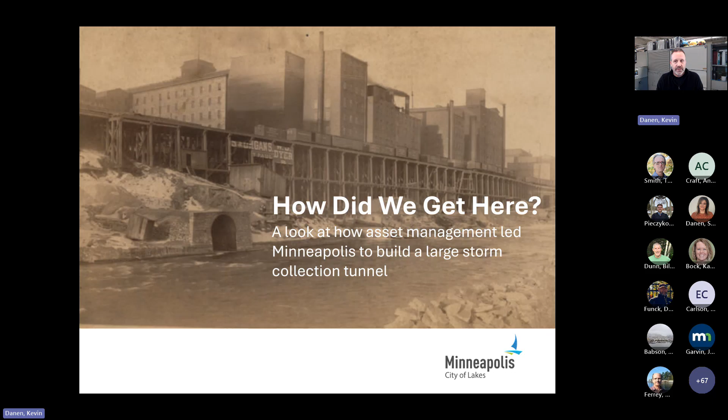We're here today to talk about, obviously, the Central City Tunnel System. And I'll be talking about how our asset management program led us to the Central City Parallel Tunnel project. First, a little overview of the sewer systems in the city of Minneapolis. We have two separate sewer systems. We have the sanitary sewer system and the storm sewer system.

The sanitary system is quite large, 830 miles of sanitary pipe in the city. It ranges anywhere from 6 inches in diameter up to 96 inches in diameter. We've been blessed with mostly a gravity feed system. However, we do have 10 lift stations. The sanitary sewer system dates back to the 1870s when they first started developing the city of Minneapolis. Some of the oldest sanitary sewers we have are in kind of the central core downtown area.

The storm system, not quite as large, 565 miles of storm pipe there. It drains over 54 square miles of city area. We've got 23 pump stations to assist us there with the flow. And we've got 400 outfalls. All the stormwater basically drains into our storm sewer system. And then we direct that flow to area creeks, lakes, and of course the Mississippi River. We've got over 30,000 catch basins to help collect all that stormwater and divert it to the tunnels.

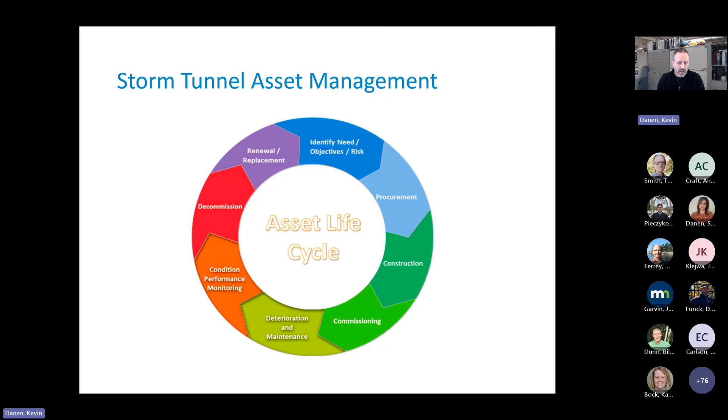And following along with asset management, we use what we call a strategic asset management system. We use a risk-based approach to our tunnels in particular, and we also do use that with the rest of our sanitary and storm sewer systems. But today we're talking about tunnels.

So we basically use two factors to determine our risk score for our tunnels. Those two factors are likelihood of failure and consequence of failure. Basically, we assign each tunnel a score according to likelihood and consequence of failures, and then we multiply those factors and come up with an overall risk score. And we use that to help us identify where we should focus the work on these tunnel systems.

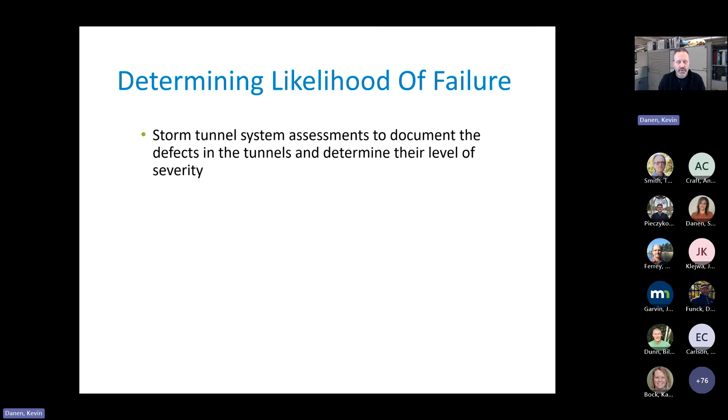When we first started doing this asset management system on the tunnels, we did a complete assessment on all of the tunnels, and it took us, we were part of a team of 4 people, it took us 56 days to inspect all 16.2 miles of tunnels. We've got 22 separate tunnel systems, so that involved a lot of mobilization, setting up cranes, setting up a lot of equipment. Like I said, these are deep tunnels, so we have to get loaded into a basket and lowered down a shaft with the crane. So a lot of work went into just even getting into the tunnels.

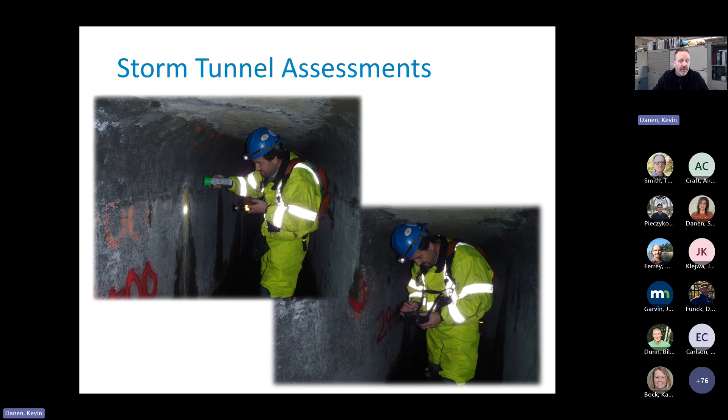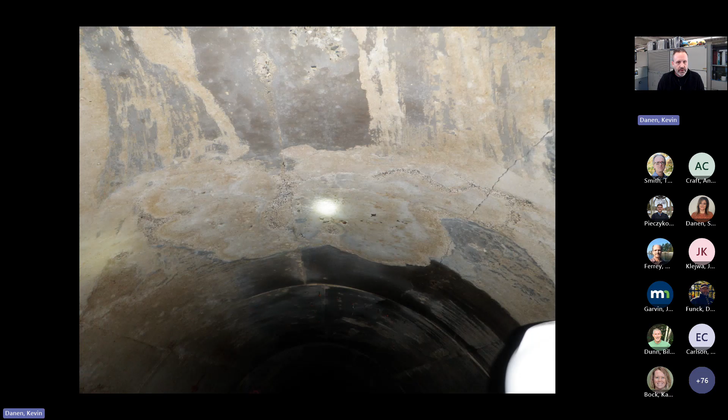Over that 56 days, we documented well over 26,000 individual defects over that whole 16.2 miles of tunnel systems that we have. So we ended up coming back with a lot of data. Typical defects that we would see when we were down in the tunnels would be cracks and fractures along the concrete. These tunnels experience a lot of pressure and stress, so the concrete cracks. We would see scouring of the concrete inside the tunnels, a lot of water flow scours the concrete away, kind of weakens that concrete surface a little bit.

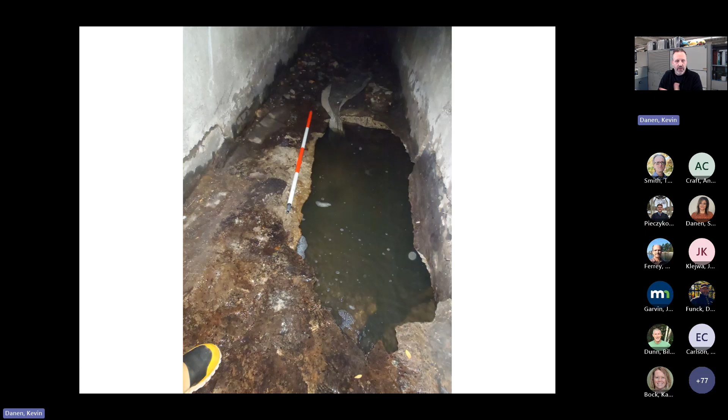We'd see some miscellaneous holes in the tunnel liner. Pouring concrete isn't an exact science, so some of the areas of concrete were a little bit thinner, and so they would just wear away or give way over time with the pressures. Here's a section of tunnel invert or the floor of the tunnel, thinner concrete, it eventually just gave way over time, and we ended up with a hole in the bottom of the tunnel.

Another kind of interesting fact is the tunnels at that depth, we are in some cases in the groundwater table here with these tunnels. So when they constructed the tunnels, they actually had to de-water and dry up the sandstone, then construct the tunnel, turn the pumps off, and now these tunnels are actually submerged. So that's kind of likelihood of failure.

The next factor that we take into consideration with the risk is determining the consequence of failure. This is a little bit easier. Each tunnel has a defined drainage area, so that we know that if that tunnel fails, and by the word fail, I mean it is no longer able to convey flow to the river or the creek or the lake, that will impact a certain defined area. So we're able to look at that area, determine the number of properties that may impact, because that failure will result in basically on-street flooding, which could impact any buildings or structures or people located within that area.

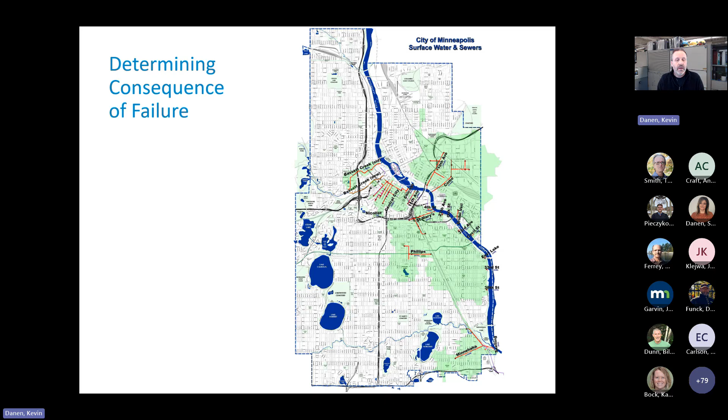Determining consequence of failure is a little bit easier. We don't have to go into the tunnels. We don't have to mobilize forces. It's basically sitting at our desks utilizing GIS, property records, photographs, and kind of determining what the extent of that consequence of failure would be. So we take all that data and we put it together and we come up with that risk score. And with that risk score, we're able to put together a priority list.

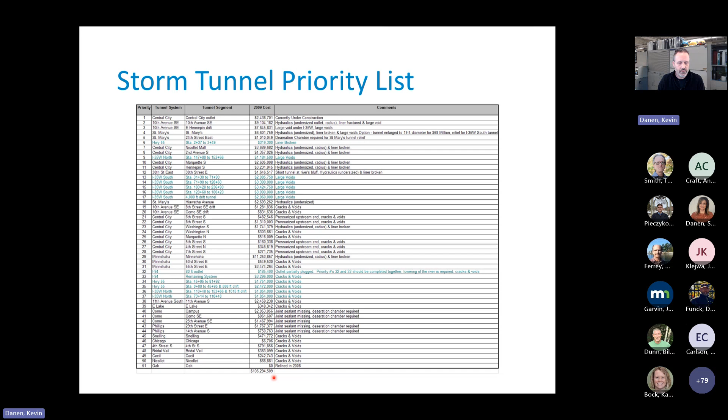We realized we couldn't do it all at once. So we put together a storm tunnel program. We kind of programmed this out, trying to do it in manageable chunks each year, but that was still a significant amount of investment. So I'll talk a little bit later about that.

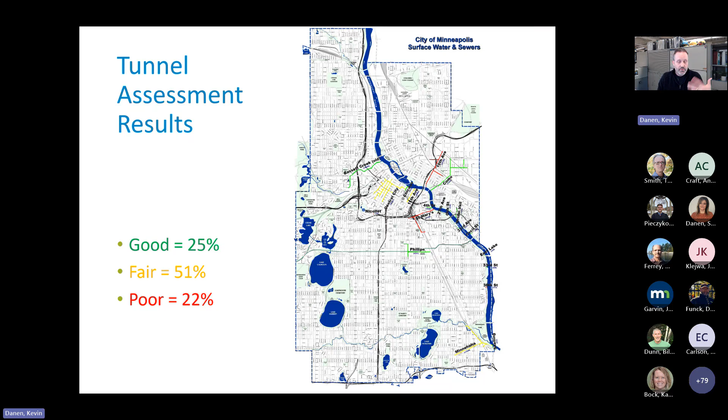As a result of all this data, we could basically say 22% of our storm tunnels are in poor condition. We need to start addressing them now, because like I said before, these storm tunnels drain 30% of the city, so it is a significant issue. So utilizing asset management, utilizing all those costs, we're able to present that message. Prior to that, our funding levels were not that great. We were often funded at a level below $2 million a year. That was appropriate for us to respond to small local failures. We could get down to the tunnels, patch those little holes, but we couldn't really do anything proactively or even start addressing some of the larger scale defects that we found in the tunnels.

What you doing back there?

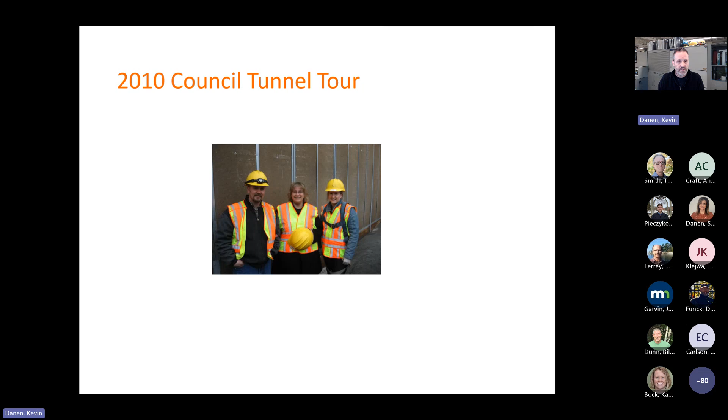So what we did is in 2010, we took that graphic and we started kind of getting out there, getting the communications out there that this is what we're up against. Our funding isn't appropriate. And one key thing that we found out that people were very receptive to is we actually took our city council down into the tunnels and we showed them what we were experiencing and what we were documenting and seeing. This was actually an amazing thing that we did here. The response was so great that they bought into it. They recognized the importance and the significance of what we were up against here.

That response, like I said, was so great, and they were giving us so much money that we had problems spending it at the rate that we were being given the money. So in 2015, we actually had to request $0 just so we could catch up with the money that we had been prior supplied with. So that response for us, like I said, worked out really great.

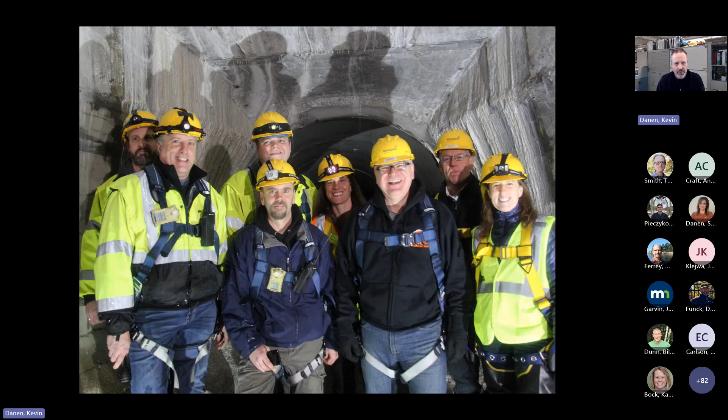So in 2011, right away, we kicked off our 10th Avenue Tunnel rehab project. It was 2 miles of tunnel. It took us 6 years to do that work, and we spent well over $10 million on that project. We kind of were getting our feet wet. We felt good about where we were going, so we kicked off the St. Mary's Tunnel rehab project in 2012. Not as long of a tunnel. Didn't require as much money. It wasn't in as bad a shape. So we really started working on those 2 tunnels.

I'll say the rehabilitation effort of those 2 tunnels was a little bit more straightforward, not as difficult as the Central City Tunnel system that I'll get into. It was kind of more crack sealing, hole repair. There were some fractures in the concrete that we had to address, but as far as tunnel rehab goes, a little more simple. The next project that was to be completed after 10th and St. Mary's was the Central City Tunnel System, kind of the core of our presentation today.

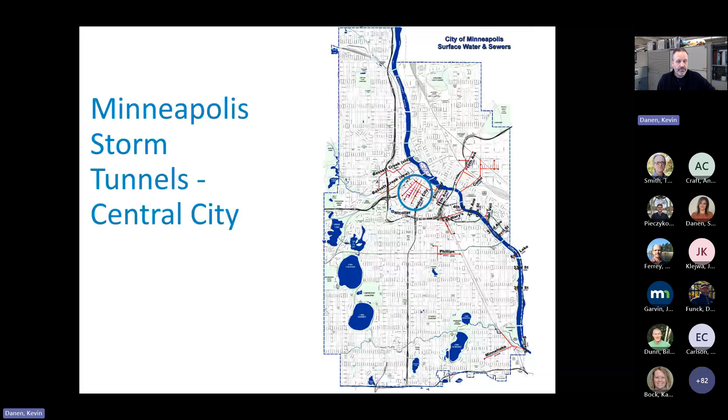Where is the Central City Tunnel System? It's right here in downtown Minneapolis. It is located basically underneath the core of downtown. It is a 4-mile long tunnel system. We have what we call drift tunnels. They feed into this one main tunnel here that takes all that water and brings it out to the river just below St. Anthony Falls. The drainage area of the Central City Tunnel System, again, it's really located underneath the core area of downtown.

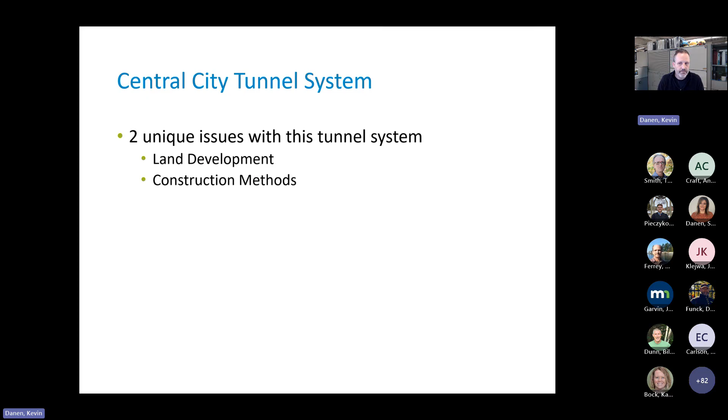So it's a critical tunnel system. Failure on this tunnel system really is not an option we ever want to consider. We do not want this tunnel in a condition where it is not able to convey that flow out to the river, because if that's the case, then we are flooding downtown, and that's not going to look good on us. So the Central City Tunnel System, like I said, it's a little bit different from the other 2 tunnel projects that we had worked on. We've got 2 unique issues with this tunnel system. The first issue is land development, and the second issue that we had to deal with was the construction methodology. So the first one being land development.

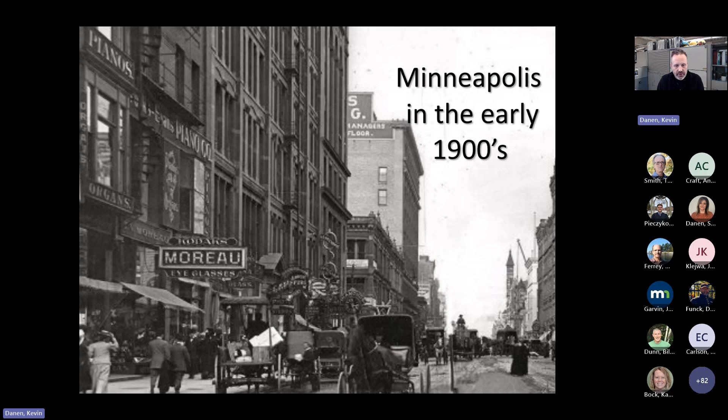When this tunnel was first constructed in the 1930s, the downtown area looked a lot different. The use was different. The buildings were different. There were dirt streets in the city of Minneapolis downtown. There were even residential houses in the downtown area. So whenever rain fell downtown, the majority of it did soak into the ground. Some residual stormwater was directed to the new Central City tunnel system that was constructed, but the vast majority of it most likely sunk into the ground and did not get conveyed directly to the river.

100 years later, downtown looked much different. A lot of the residential areas were gone. The vast majority of surface area was impervious. So all that rainwater pretty much got directed to the Central City tunnel system now. So that resulted in the Central City tunnel system being overpressurized. It just was not designed to handle that much water.

The second unique issue that we have with the Central City tunnel system is the construction methodology. So back in the 1930s, when they constructed the tunnel, they mined out through the sandstone an area sufficient enough for them to work in. They had rail cars going down the tunnels that they would dump the sandstone into and rail it all the way out to the end and then get rid of it from there. They mined it so that they could run communication and electric lines through the tunnel systems, because like I said, this is 4 miles of tunnels that they were building. So they needed lighting and communications down there. And they even mined out enough area to stage some of the materials down there.

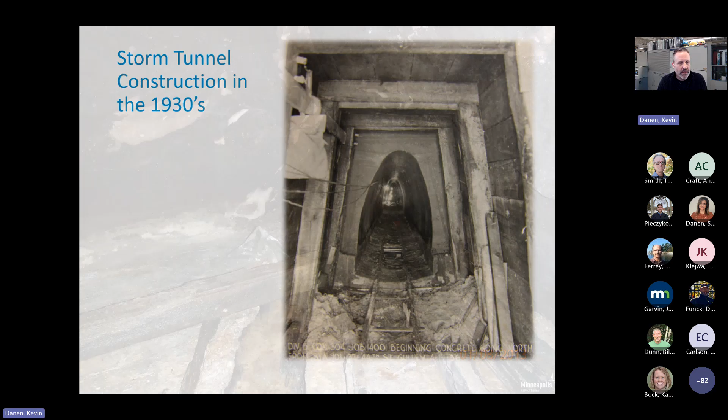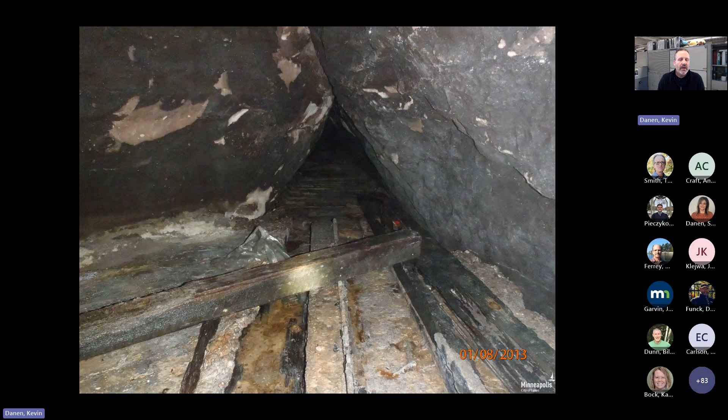Through our investigations, we found that that wood over 100 years, it was exposed to the air and groundwater and it decayed. This is a picture of a similar area there compared to the previous picture. You can see here's the crown of the old excavation that they had, and here's some of that remaining wood. Here's a better picture. You can see all the wood has deteriorated from around the concrete, and we've got the large void above the tunnel, and we've got the void on the sides of the tunnel where that wood once was.

Now, why is that an issue? Like I said, these tunnels are not reinforced. They rely on contact with the surrounding sandstone to withstand their pressures. So once all that wood eroded away and decayed away, there was nothing to support the top or the sides of the tunnel when it pressurized. Back in the 30s, when they first built it, it probably wasn't an issue. The tunnels were not pressurized.

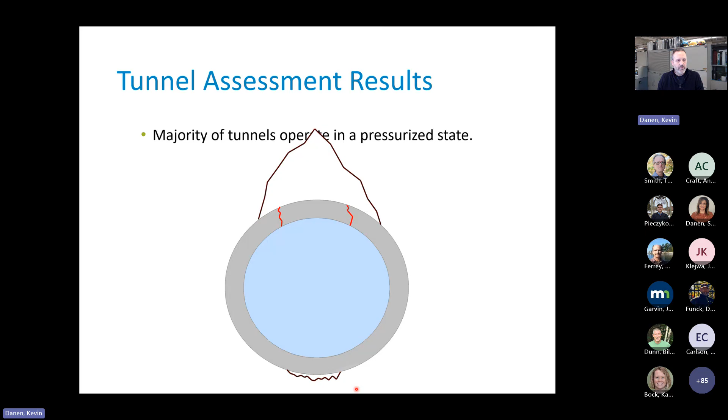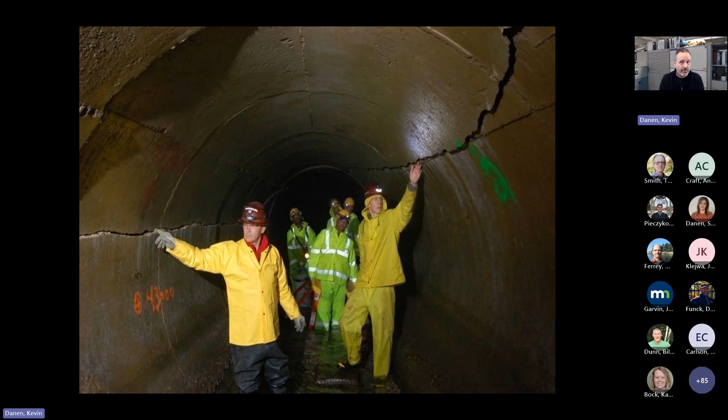So over time, the concrete tunnels would crack, and this is what that looks like. So you can see the two cracks. The top of the tunnel would actually eventually get to the point, in this case, where the top of the tunnel lifted off. There was so much pressure in the tunnel that the concrete lifted off and shifted over a couple inches and came back down. So if you can imagine the forces that are going on in these tunnels, the pressure down there, that there's enough pressure that it lifted this huge slab of concrete up and over. You can begin to understand the pressures that these tunnels are experiencing because we've put so much water into them.

Over time, water gets out of these cracks and it starts eroding additional sandstone outside of the tunnel and making these voids larger, thus reducing the ability of the sandstone even more to support the forces outside of the tunnel. What happens when that starts happening is here's a fracture in the top of the tunnel. Water's jetting out over the top of the tunnel, eroding that sandstone and bringing all that sandstone back into the tunnel. This is a 6-foot tunnel. This is, again, located in about the same area that those old time pictures were located in.

There's so much sand in the bottom of this tunnel that we now had to duck walk through the tunnel. It was reduced to about 3 feet. This in turn reduces the capacity of the tunnel, which backs up the storm water towards the street surface. So it causes even yet more pressure in the tunnel. So this is kind of a cycle that we got into here that we really had to correct.

Over time, we get to the point where there's complete tunnel liner failure. The void is so big, the concrete has been weakened so much that the concrete just gives way. And then we're kind of in a completely uncontrolled state. The water is outside of the tunnel. It's traveling all up and down the tunnel, eroding sandstone. And now what may have been kind of a localized failure is now a long failure, linearly long.

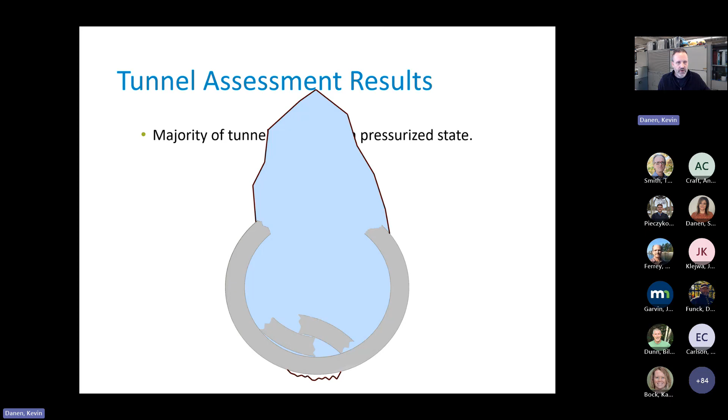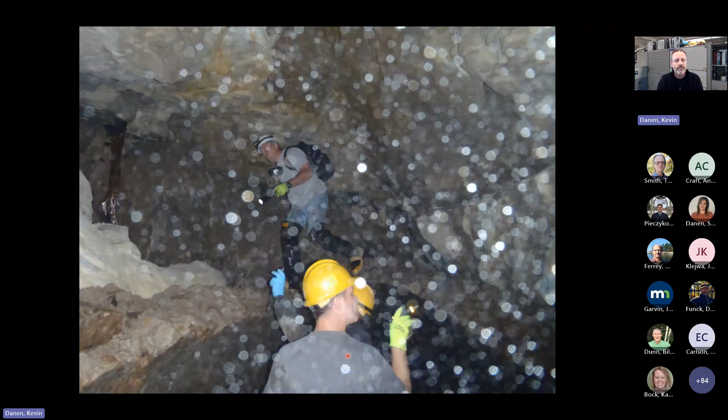This is what that looks like. So here we've got the edge of the top of the concrete. It is totally gone. There's a picture of Joe. He's on top of the tunnel, exploring what has now become this very large void above the tunnels. These voids can get quite massive.

This had probably been going on for quite a period of time when we discovered this. So this void, at least in this location, extended for a couple 100 feet. We had to go down and explore these voids and understand what was happening here. It was part of our kind of learning process on how to deal with this tunnel system.

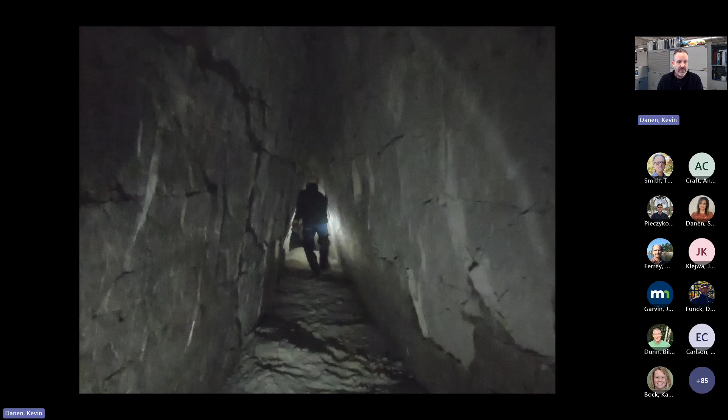The void here extended for well over 2,000 feet. It was about 6 city blocks, I believe, that the void was. We had to determine the extent of this void, so we had to follow it basically until the end and map out this void. Now, why are the voids important?

So when we create the project, we are not only restoring the broken concrete of the tunnel liner, but we also have to restore that support structure around the tunnel. So we need to fill these voids. And in order to calculate quantities of material to use to fill the voids, we actually had to physically get into the voids and map them out, determine cross-sectional areas, and come up with our quantity calculations. So a lot of investigation happened not only in the tunnels, but outside of the tunnels too.

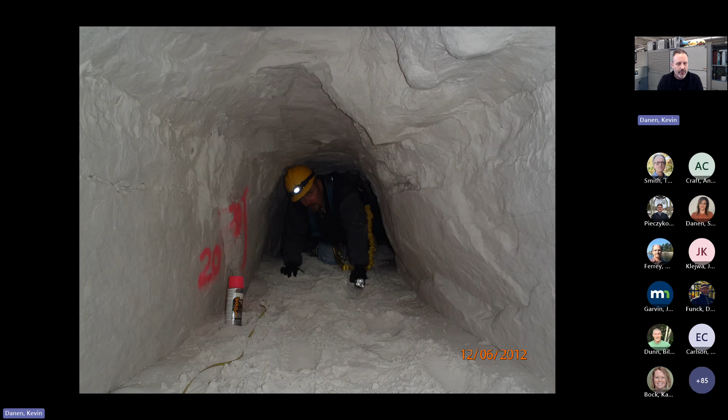One section of the voids, again, it's very coincidental that all of this happened pretty much in the same location that old time picture happened. This section of the void was probably 40 to 50 feet tall, probably similar measurements horizontally. This void we could easily have parked 2 city buses in. It had gotten to be that big over the 100-year period that this tunnel was in operation.

So bring it kind of back to Central City. We had completed the 10th Avenue Tunnel project. We had completed the St. Mary's Tunnel project. Now was the Central City Tunnel system with its unique features and characteristics. It was a little bit different.

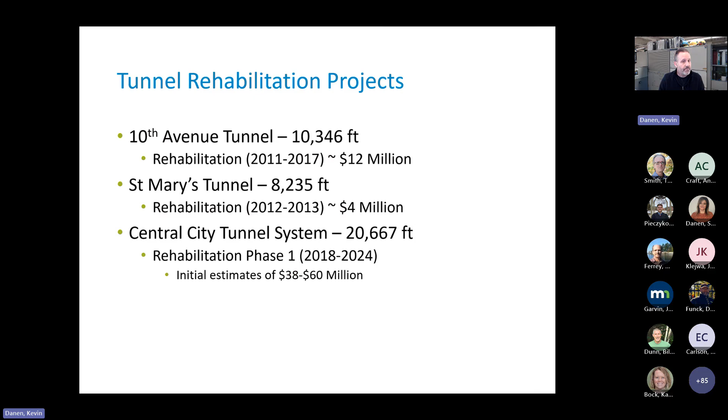We initially started looking at this in 2018, and initial estimates of correcting all these situations were running really high. $38 to $60 million was the range of estimates. So we spent quite a bit of time on this project. I'll turn it over to Joe at this point in time, and he can get more into the actual project, the Central City, and what we decided to do to manage this project.

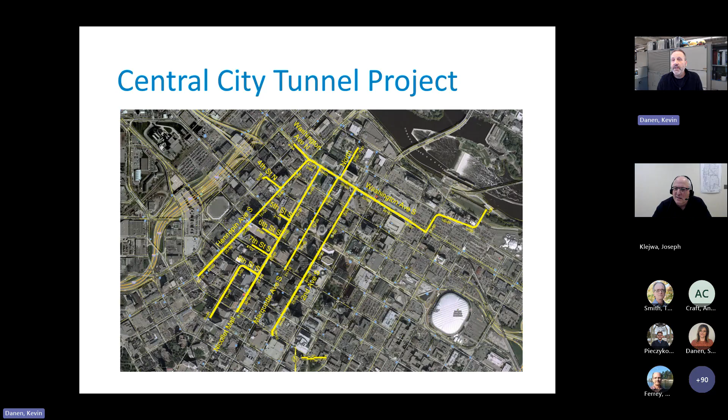So I will stop share. All right. I'll stop sharing here if I can find the button. There we go. All right, take it away, Joe. All right. So I'm going to share my screen. I hope everyone can see that.

So I'm going to pick up the presentation here, like Kevin described, and talk about the actual project of redoing, in a sense, our Central City parallel tunnel in 2021. We started before. I guess what I'm going to try to do is just give an overview of the progression of kind of the building of this tunnel, and show a lot of pictures and videos just to describe the project and what we did.

As Kevin explained, after much inspection and assessment of our sewer system, we started on the road to prioritizing and rehabilitating and reconstructing our critical infrastructure. And Central City under our downtown was obviously very critical in nature. We'd been spending $500,000, sometimes $2 million maintaining this each year, and not to mention all of our workers down there working in the winters just trying to maintain this. So we realized we had to do something.

The tunnels that run under Nicollet, Hennepin, Second Avenue, Marquette were typically about three foot wide by 6 feet tall. So there's four of those tunnels running under our main streets, and they're all emptying into the Washington Avenue tunnel, which was a 6 by 6 horseshoe tunnel. So if you do the math, if all those other 6 by 3 tunnels are full and they're running to a 6 by 6 tunnel down Washington, we had a huge problem, and we could only adequately handle about a 2-year rain event.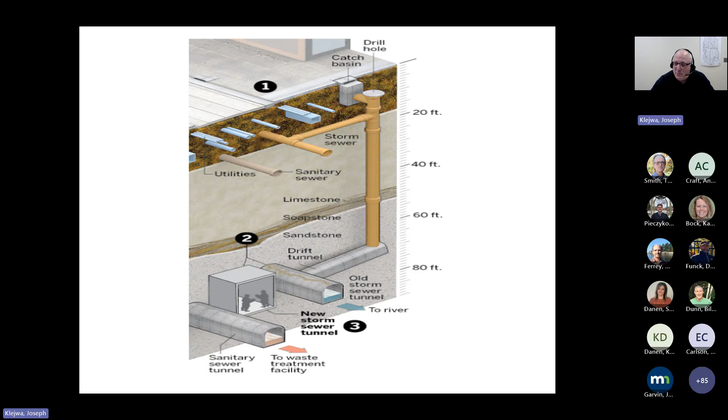So we had an extensive matrix that we went through, a long decision tree and process of trying to decide where we could even put any of our shafts or other dewatering wells. Plans and specs were put together, and eventually the project was put out to bid, and we contracted with PCI Roads to build the tunnel. And again, this tunnel is about 70 to 80 feet down below the surface.

This diagram is what we shared a lot with the public, with the elected officials, residents, and businesses before we started the project, just to convey what we were doing, but also why we were doing it. So a lot of those pictures that Kevin shared we shared with them to show them the need for this project, that it wasn't just we want to build a new tunnel, but there was a great need, and that our existing tunnel had served well over 100, up to 150 years, and we needed to do something to enlarge it.

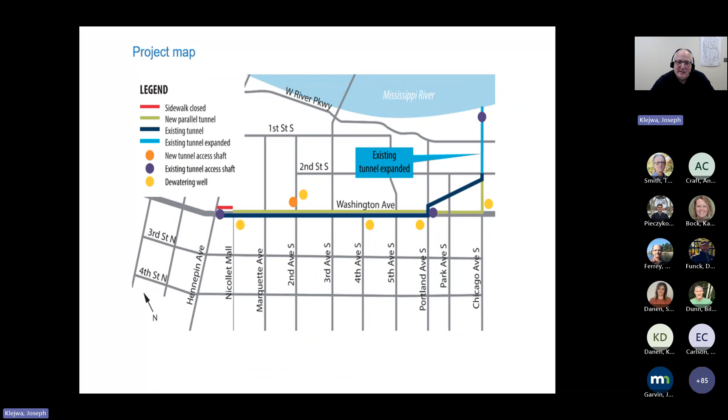So here, again, limited space downtown. That was some of our difficulty. We had to dewater so that we could do the work and make it basically a dry excavation to pour the concrete liner. We had room for 5 dewatering wells along the route, so about every 2 blocks. And our overall project length was about 0.8 of a mile. So every 2 blocks we had to dewater so we could draw down that water. And here is one of the dewatering wells on 4th Avenue.

So our project basically began in fall of 2021. Our first job was to dewater the project so we could start work. And here is on Nicollet Mall. This is another area where we started dewatering, and we found upon starting pumping the water that we were bringing in contaminated water, which is not unusual for Minneapolis. Obviously our history in the past has allowed a lot of contamination along the route.

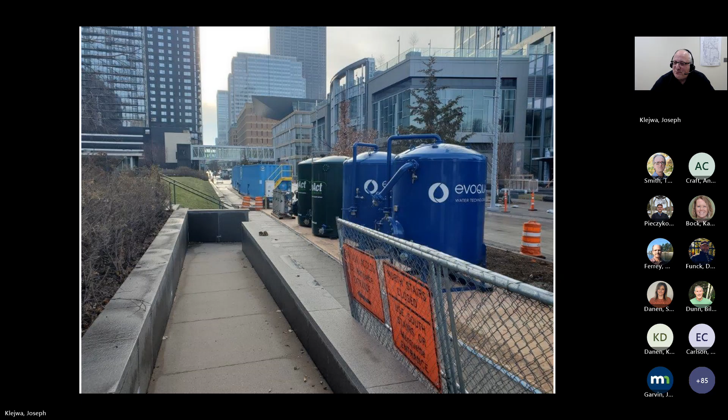So in the fall of 2021, besides putting in those dewatering wells, PCI was also starting the construction of the 12-foot diameter access shaft at 2nd Avenue and Washington. So basically what that involved was putting casing down through the overlying loose soil down to the top of the limestone bedrock layer. And then the limestone, shale, and sandstone bedrock was cored into smaller pieces until they basically reached the depth of excavation for the new tunnel, which was about 75, 80 feet.

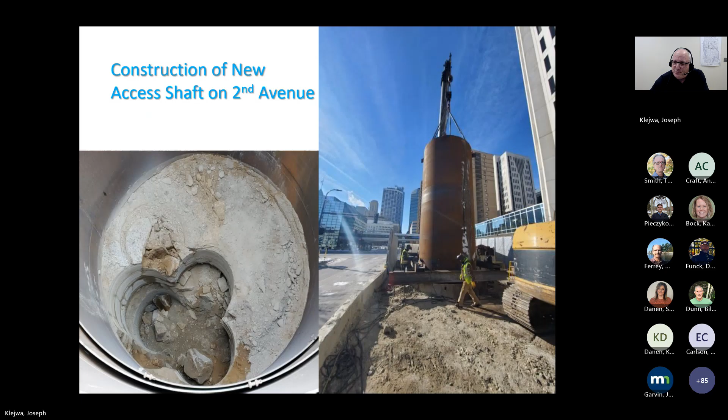And here's just the access shaft at 2nd Avenue, then, was set up with crane equipment, and personnel were lowered in to begin mining operations basically in the early winter of 2022. A large ventilation system had to be placed in there to provide adequate ventilation for the workers due to the equipment they were using down below and the dust.

And basically the ventilation equipment created quite a bit of noise, and some of the things that we put up on the fencing, such as noise mats, did help in reducing the noise to the nearby businesses and residents. As you can see at 2nd Avenue and Washington, we were just close to a lot of people, whether it be businesses or apartment buildings, things like that.

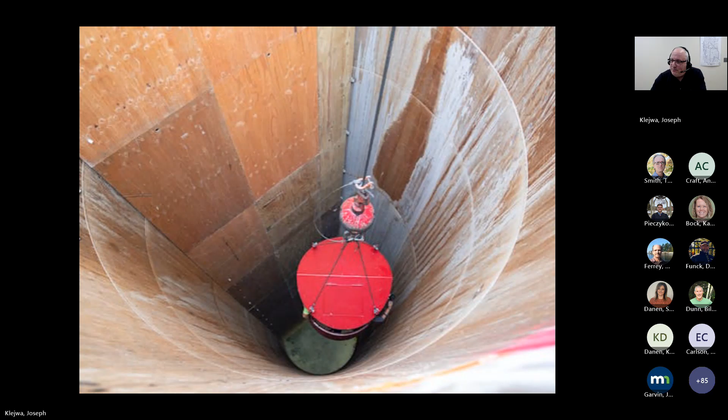So here's a shot of basically the completed tunnel up above with the steel casing, but below they left it as unfinished sandstone until the very end of the project, which they eventually then did line and concrete. And here's a shot of that again from below, just bringing down the basket.

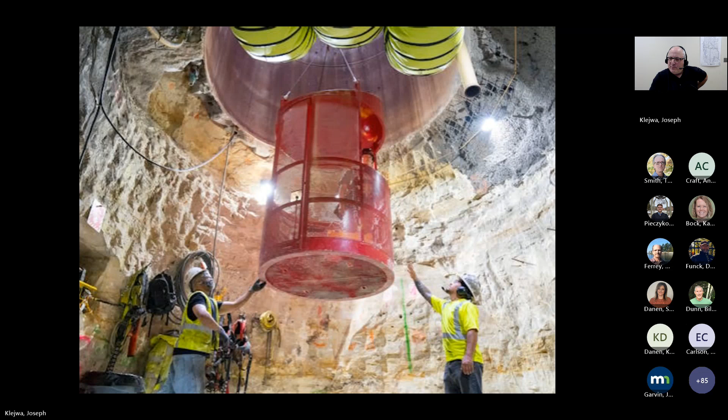Being the type of project, we had to work in proximity to all this and try to be a good neighbor. And again, those noise mats and even the fencing banners made it a little more aesthetically pleasing, kept the noise down. And again, we were able to keep this new tunnel construction separate from the old tunnel so that we could work in isolation all year long, which was kind of a unique feature of this tunnel.

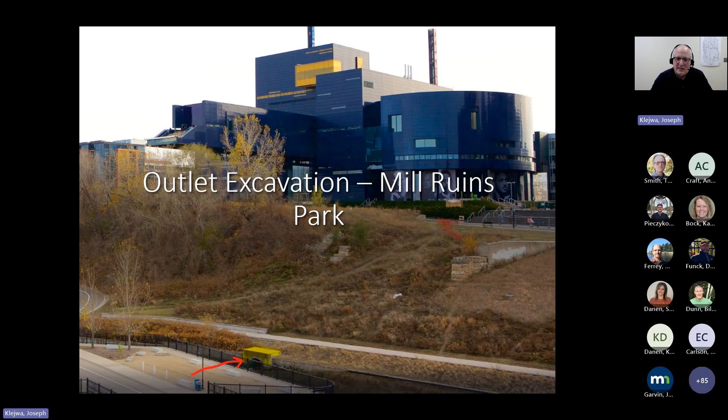A big obstacle that we had in this area was simply the various material that we ran across in this area. We had to get an easement from the park board, work with them, and then work with the various things we knew we were going to find in the slope from the historic background of this area being a milling district. In the back there, you can see the old Washburn Crosby mill.

In the fall of 2021, we started removal over that existing tunnel, and we ended up having to remove more soil than we had intended to. And during that excavation, we ran into a lot of contaminated soils, such as asbestos. And in addition, we also had to dig back further into the slope.

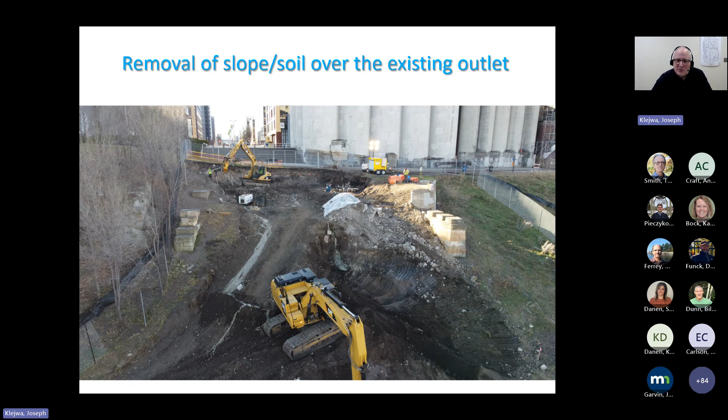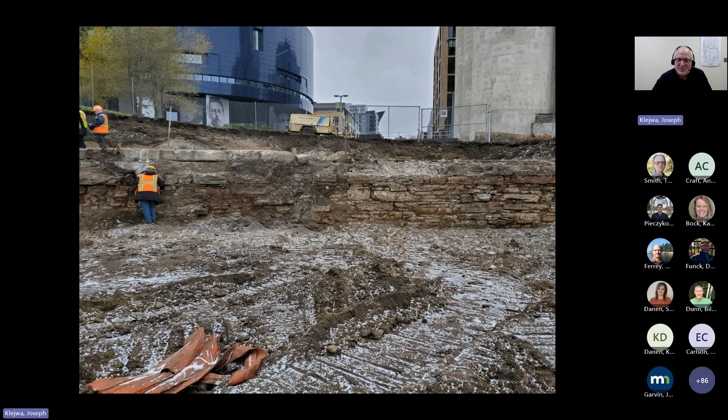And when we did, we ran across this, which was basically a head race canal tunnel that carried water to the Pillsbury mill that used to be right on this corner here. So that kind of made the project come to a screeching halt of sorts. And we had to consult then, obviously, the state historic preservation office to talk about what our next steps were.

Here's just another shot of the top of that canal. It had basically braces across to hold it together, but as you can see, it was filled with debris from what ended up being roughly the 60s and 70s. Any adjacent building nearby decided to use this as a place to pile all their demo debris into, which didn't help us either because we had to deal with part of that too.

So again, huge challenge with all the contamination and things we found here, and working with the historic society and whatnot. So some obstacle.

And here again, as we started construction, we took away some of that slope, we had to put down some tunnel shotcrete on the slope to keep it from falling onto the workers, and a cofferdam was put up, and there you can see the size of the outlet. It's pretty small. It was not huge, and so it was not allowing the water to escape quickly, thus causing basically a backed up water hose. It was just causing pressure all the way up the system.

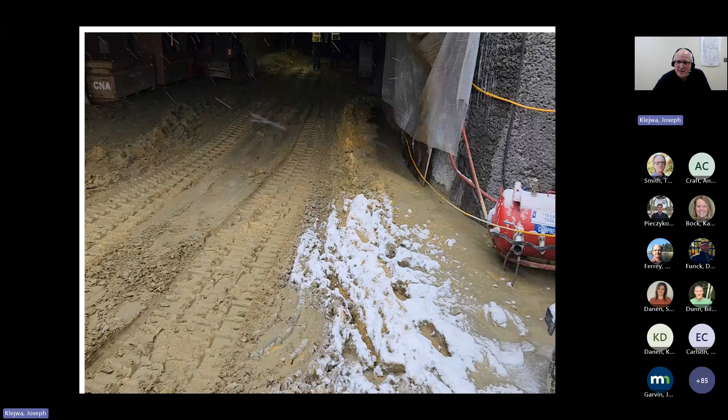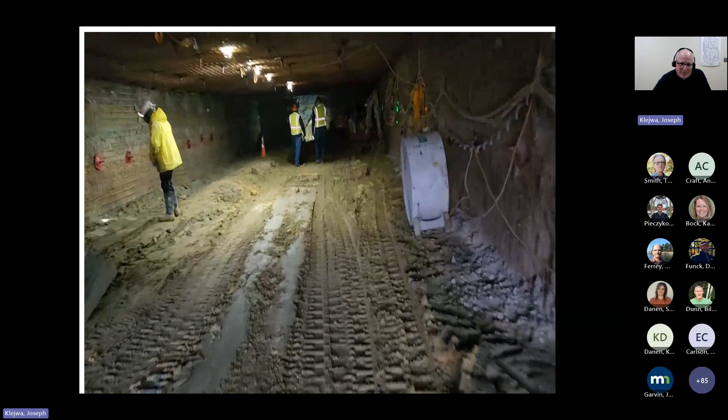Here's a little video showing some of the excavation that we had going on here at the outlet, just to give you a little taste of what was happening here. They have basically mined part of this, and they have some mesh and rock bolts to hold the structure up from above, and they're just tapping out some of the sandstone.

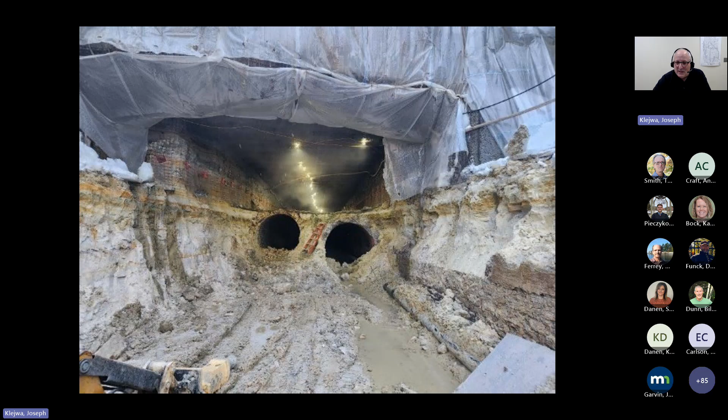And here's another shot. This is looking from the river up into that same tunnel I was just showing you. We had two tunnels. The one on the right here is the tunnel that takes all the water from downtown Minneapolis, from our oldest central city. And the tunnel on the left is from Chicago Avenue. So basically this outlet is providing an outlet for two separate storm systems.

This picture shows what we were able to do with our construction. So we had the new shaft right here at 2nd Avenue. We were able to mine this way, and then they would mine this way all the way down toward Portland. This is our existing shaft at Portland. And they kept this in isolation, and they were able to mine this way toward Chicago. And then the outlet that I just showed you, they were able to mine this way. So we were able to work in at least four different directions at the same time, which helped get some of the work done more quickly.

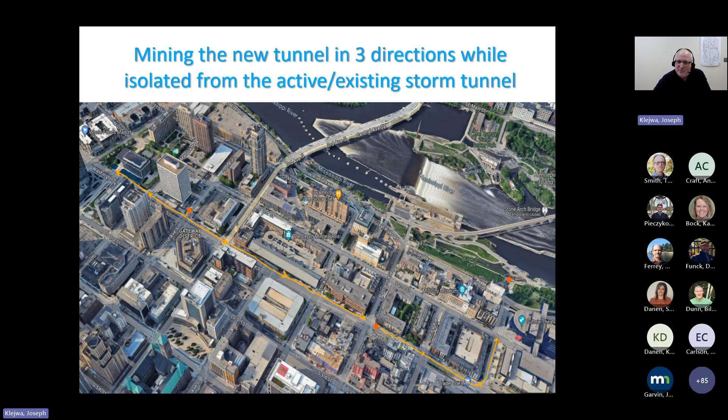I'm just going to show you a couple of shots here of the cutter. It was not a big tunnel boring machine. It was simply almost like little rotating heads, and I'm going to show you a video clip in a second, but it just worked away at scraping away the sandstone, which is somewhat easily mineable, and the sandstone layer lies underneath a limestone bedrock up above. So that limestone above gave a kind of competent bedrock to mine up under.

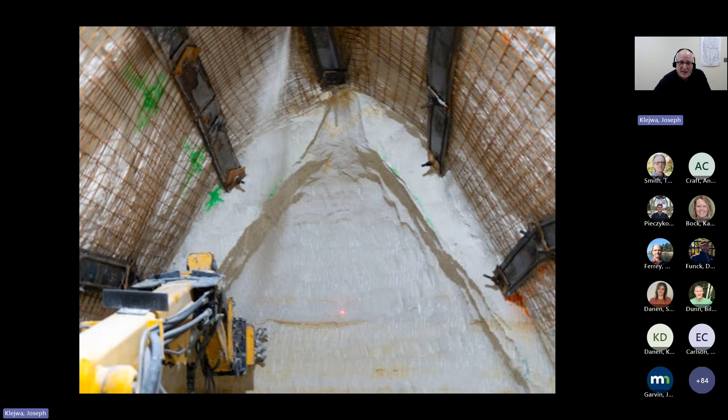And here you can see the mesh on the wall and the rock bolting to protect the workers while they're working. And they're just using lasers here. They're making basically a cathedral shaped tunnel. And here they're just hauling out with very small equipment. And here's a video, again, an example of how it's mining.

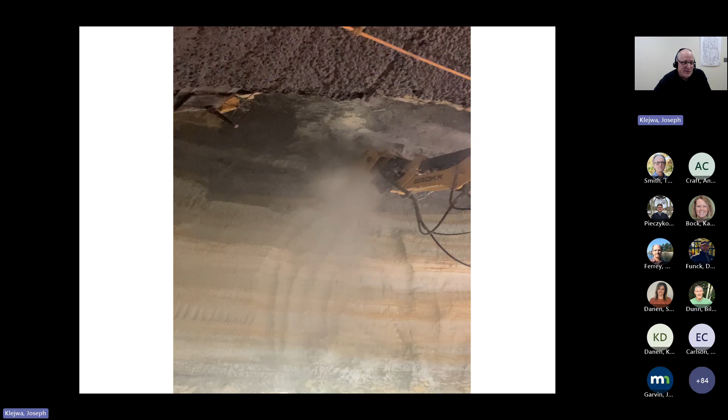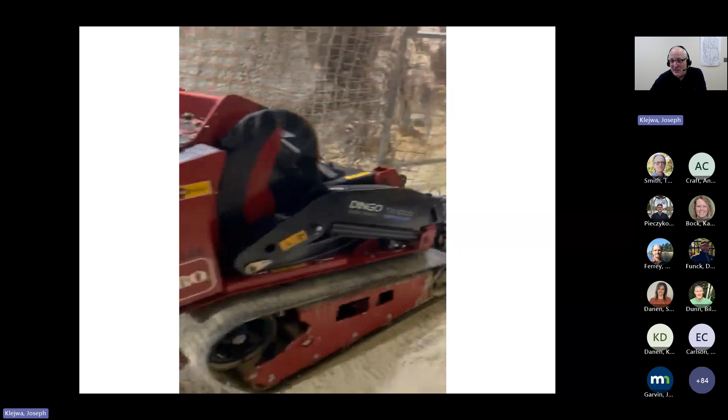So it wasn't a fast process. They would just literally be scooping up some of the sandstone as they're working, scoop it away. They'd be mining concurrently at the same time, but it was not a super fast process.

We had different shapes depending on the geology. So we have, like I said, the limestone layer lying over the sandstone, and the limestone would dip and dive at times. So the shape of our tunnel varied from a cathedral, which they had just been mining in that slide, to various box sections. So we had to work within the confines of the geology to make this work. You would mine up to the limestone, but that made our shapes and our tunnel change over time. And as we were adding more water input from various streets, we would have to enlarge the tunnel for volume capacity.

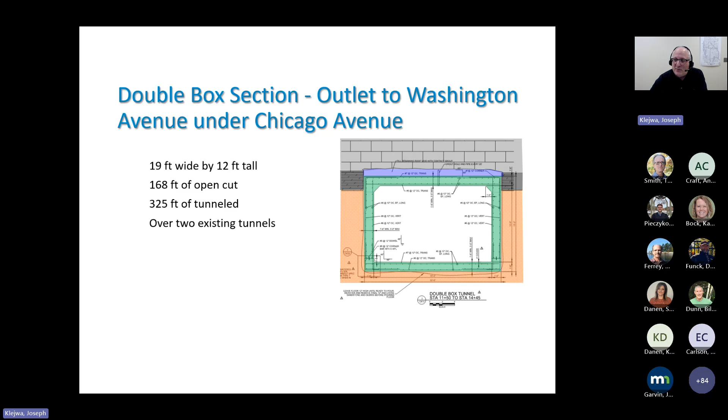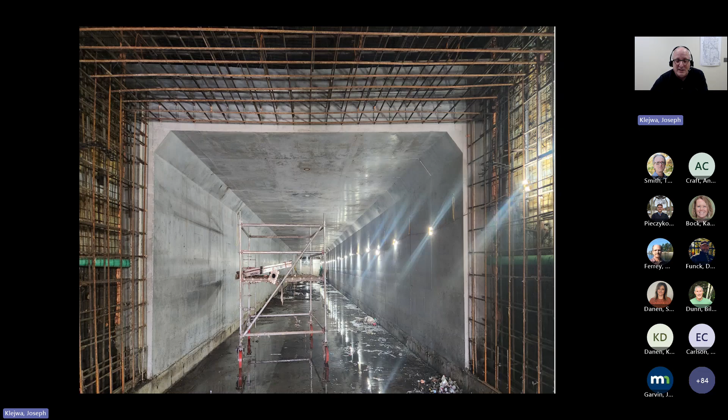Here, this shows just a section of that double box section, just with finished sides and floor next adjacent to unfinished rebar. So they'd always just work in progression, rebarring, and then pulling that form along, and eventually pouring a new form in the next week.

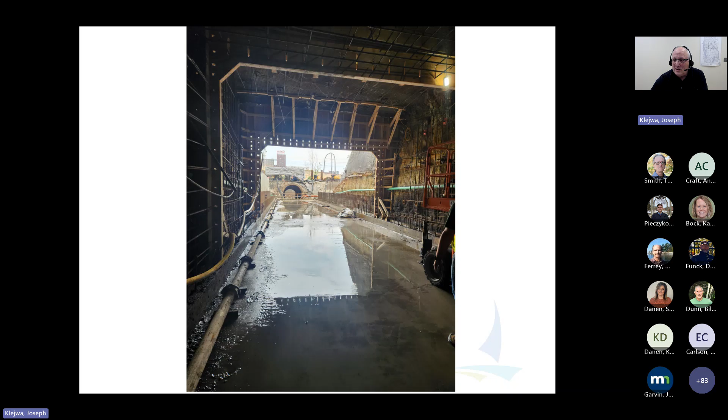This is a shot of again at the outlet where they're getting near done. You can see a little part of that old section of that old outlet there in the foreground or background, and they're working though on the new tunnel section. Here's a shot looking from above. The old outlet is there to the left, and the new outlet that's been done, and they're eventually going to be meeting this and demoing this last section. So this is all at the outlet.

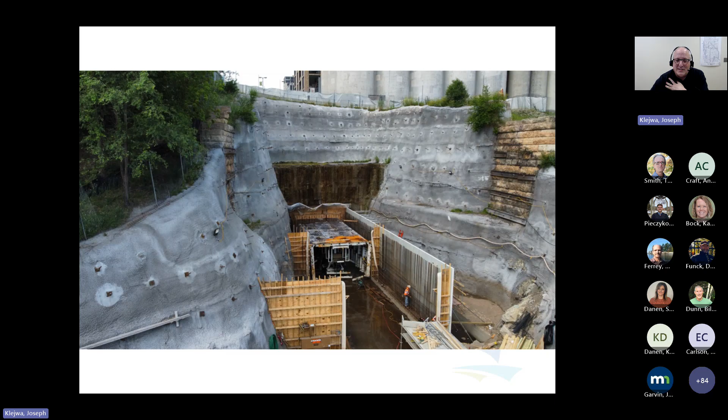There's again a shot of the shotcrete that they had to put on the soil around that area to protect the workers. And then also here you can see this was an old railroad pier that we also had to work with, these historic items, and not damage them. And so that was also obviously a challenge besides the contamination we found in the area and the head race tunnel.

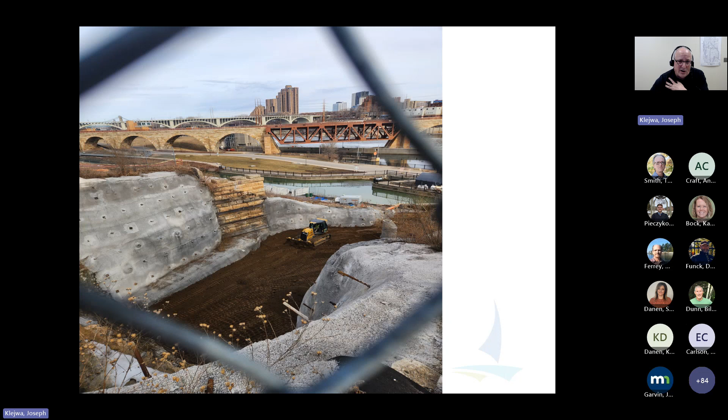This again a shot now when that outlet was done. They just started putting new soil on there, and you can see the Stone Arch Bridge and where we are in relation to the Mississippi River. Again, here's just another box section, different part of the tunnel. I'm just going to show you a few pictures and try to get through this.

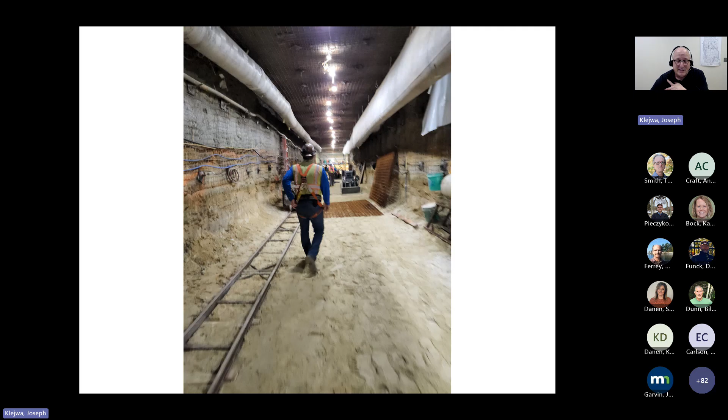This is where they mined it. They put up the mesh and the rock bolts, but no concrete had been done yet. This is kind of by Portland Avenue and Washington. You would see that they use some rails here to basically haul out some of their mined sandstone. And then you see the ventilation pipes on the ceiling there that were providing ventilation, but also a problem at the surface because of the noise for the machinery to do that ventilation.

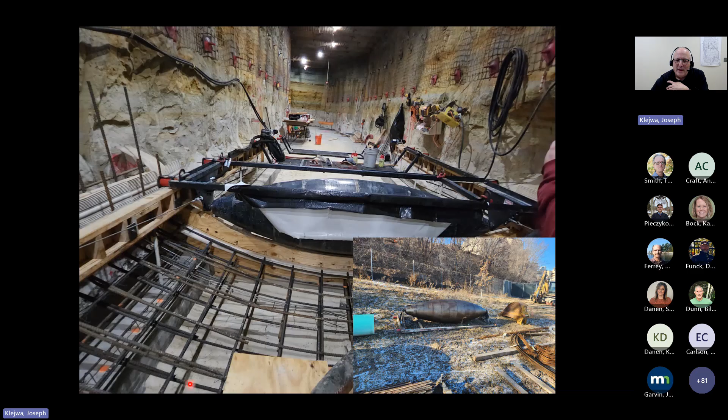Here's just a shot of it showing it cured, and then you have basically a poured curb wall, and then you would do the next section. When you pull that form across, you would do these walls and the ceiling or the crown.

Let's see here. I gotta get rid of this pointer here so I can.

And this is again just a different part of it now being finished. Just kind of give you an idea of how massive this thing was. Various sizes, 12 by 12 at times, 12 by 8. By the outlet is 20 feet wide by 12 feet tall. So just a very long, large tunnel.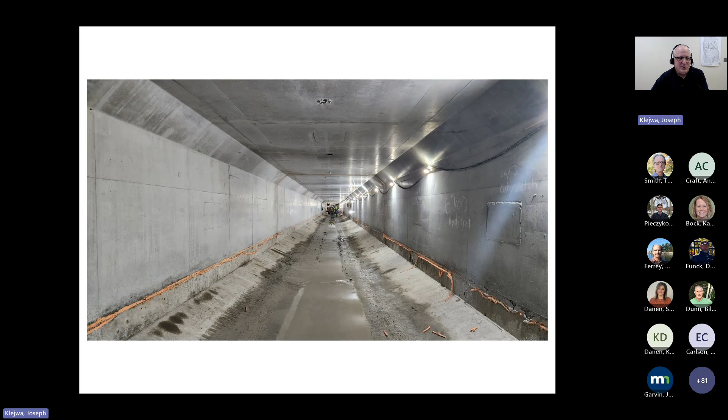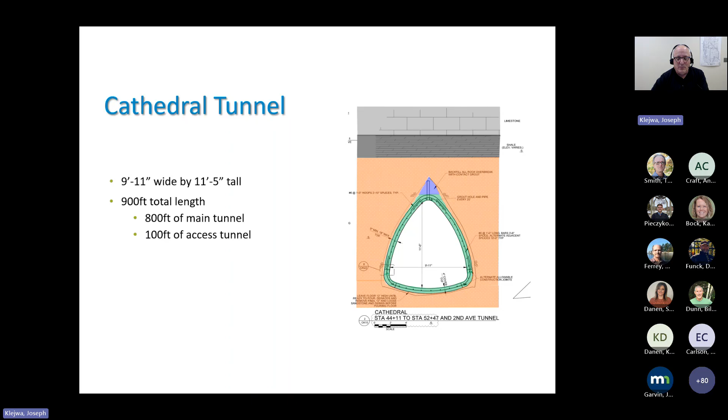Again, in the very upper part of our tunnel near Washington Avenue and Nicollet, we did a cathedral. We didn't need the tunnel as big at that point because we didn't have as much water flowing into that new tunnel at that point. So just a different shape. This just shows you the various shape and then the size of how they did that tunnel with, again, a similar form, but it's cathedral shape. And then a shot of the tunnel being finished that way.

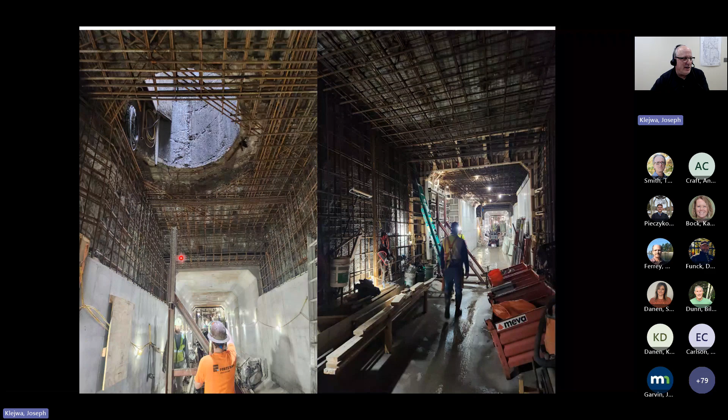And then finally we connected the tunnel at roughly Portland and Washington. That was our final phase. And this is the existing shaft that we had at Portland Avenue. We had to work around that, rebar it up, and then connect the two tunnels and in a sense make it live. At this point, the new tunnel was open to groundwater and to the old tunnel system, so we had to work carefully and around the weather.

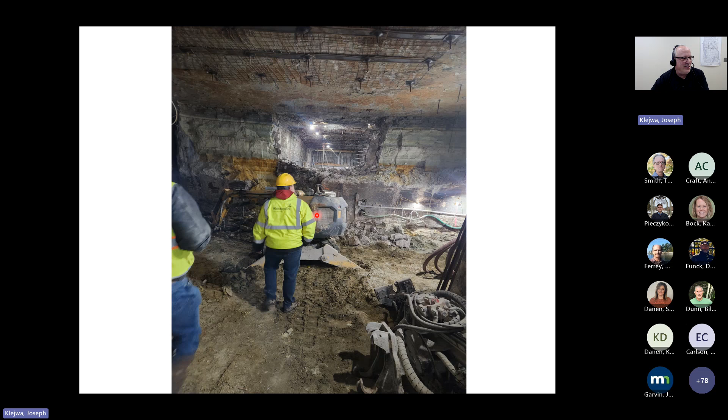And this kind of shows the massive connection point there at Portland Avenue. You've got basically some of the old tunnel sections that are crisscross and meeting this new tunnel section here that is going this way. And then what we also did is we wanted to interconnect the old and the new tunnel together so that as the water levels rise, they would rise together and provide the largest amount of capacity for our rain events.

So this is our old tunnel here. This is a typical tunnel size, 3 by 6, that goes down Nicollet and Hennepin, 2nd and Marquette, and then it's tying into the new tunnel that's over here.

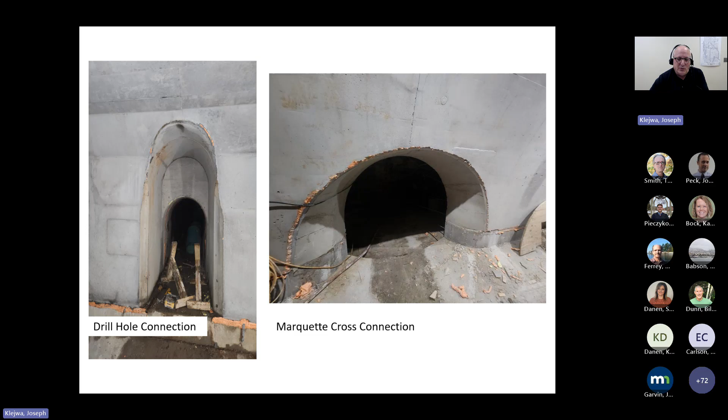Again, there's some connections, and this is a drill hole. This is the water coming down from the catch basins and a drill hole, basically 16-inch, 24-inch drill holes that came from the surface. And then these are some of our interconnections between old and new tunnels. And this is a shot of as we're getting near completion of the outlet. And that was just, again, to give you a little feel for some of the construction that we had.

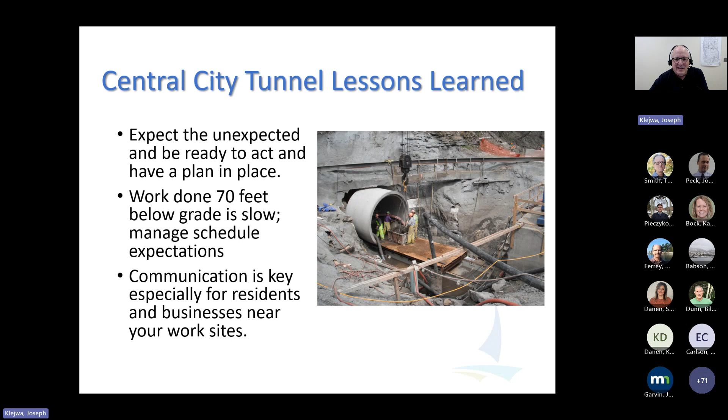Things that we learned: expect the unexpected, like the contamination, be ready to act and have a plan in place. We work 70 feet down below, so work didn't happen real fast, and communication to the residents, to the elected officials and businesses was key.

One way that we did that, we made these banners that I described that we put on our fences, and they gave a little bit of information about what the project was, maybe a map of things, and some old pictures from when the original tunnel was built, just to give a little flair and to make it look a little better aesthetically. We would have a QR code and a website so people could find out about the project with their cell phones and link them up to our website if they wanted.

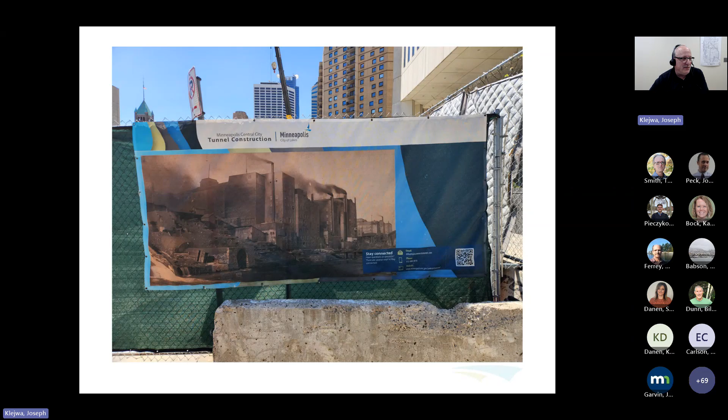And this picture is just a funny story. We worked with a company to put up these fence banners, and we went back and forth, and they kept putting this picture in there as one of the final pictures for the project. And I kept saying to them, I don't think this is going to work well with a man being carried out of the tunnel. So probably three times it took me to finally get them to take this picture out of there, because I didn't think it would convey a very good story for our tunnel.

And lastly, these are the quilted mats that were noise barriers that reduced the decibels from our project sites that we had in the city, and it helped quite a bit.

So lastly, I'm going to leave you with a few-minute clip. We had WCCO and Star Tribune come down to our tunnels, and they both did great stories, and I'm just going to try to play that for you. It's coming from YouTube, so we might get a short little commercial at first. Let me try to roll that.

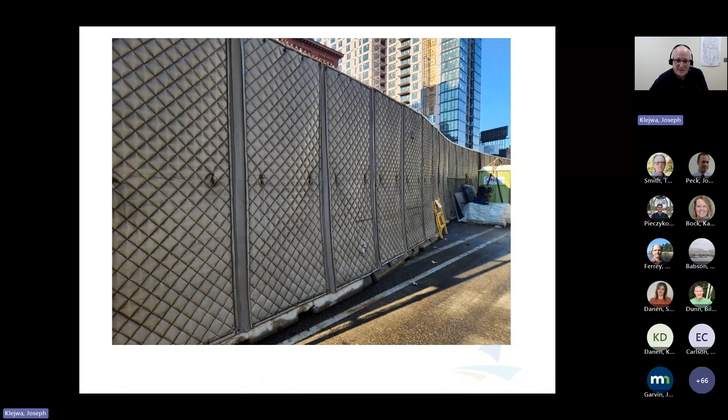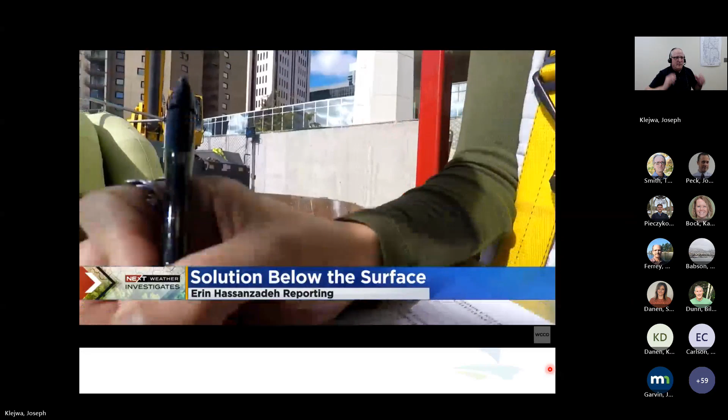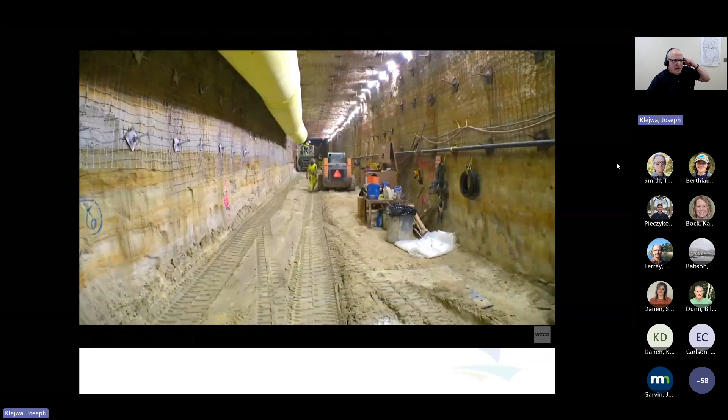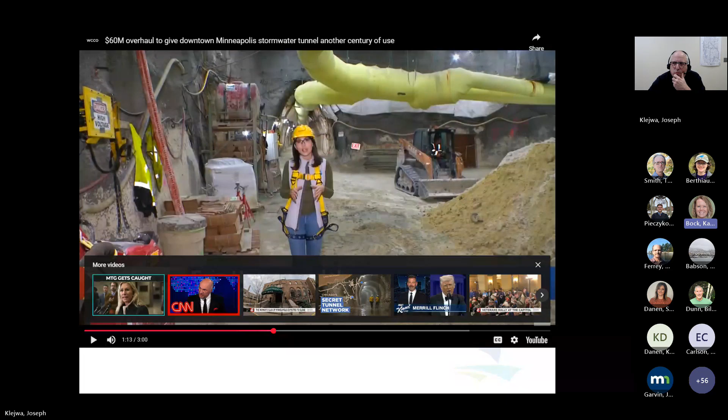You hearing it, Joe? There's no sound. Still no sound? Nope. Yeah, you have to share with audio on Teams for the sound to come through. How do I do that? I believe you would have to unshare and then reshare your presentation with sound, but it's also after the top of the hour. Okay. Yeah, sorry about that. I apologize. I hadn't had a problem with the sound in the past. There's a link. They posted a link. The link's in the chat. Oh, perfect, sorry. Okay, so that ends that portion. I apologize for the sound not working.

That's okay. No worries. I saw Kevin was going through the chat and answering questions. I do want to be respectful of everybody's time. I think the only question that wasn't answered was what you guys did with all of the sand that you were removing from the tunnel. Oh, nope, you did get to that one too. It was disposed of. Yeah, and the sand went to McCrossan, who owns PCI. So what they did with it at that point, but it makes great golf course bunker sand. But it was a massive amount. Yeah, I'm sure.

All right, I think that was it for our questions. This was, as expected, an incredibly interesting presentation, just fascinating stuff. I did see Emma asked if there's any way to get a tour of the tunnels if you're not the governor or a city council member. You know, it is quite an effort to put together staff to support a tunnel tour. It's cranes, it's traffic diversion, it's stuff like that. But if we get enough people interested, we can make it happen.